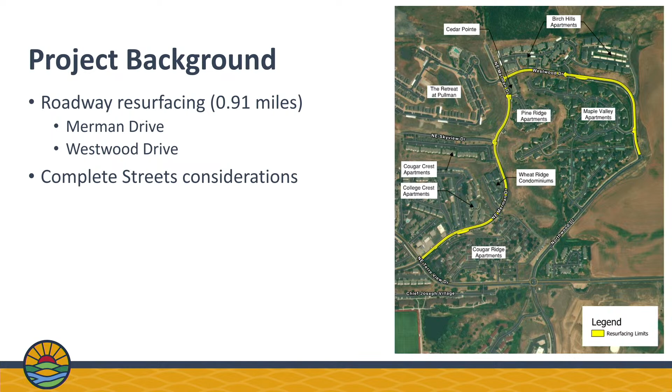In line with this policy, I will highlight several complete streets features that have been designed and incorporated into this project. The first focuses on pedestrian travel. The project will upgrade 7 existing curb ramps to be ADA compliant. In addition, 3 brand-new curb ramps will be constructed along the route. On the screen, there's a star roughly at those locations.

We also are able to install 2 new bus pullouts. This is a heavily used bus route. Actually, when you talk to transit, I think a bus comes through here once every 6 minutes. Most of the bus traffic tends to travel presently in the westbound direction around a loop, but there is a route, I believe, that also goes in the eastbound direction.

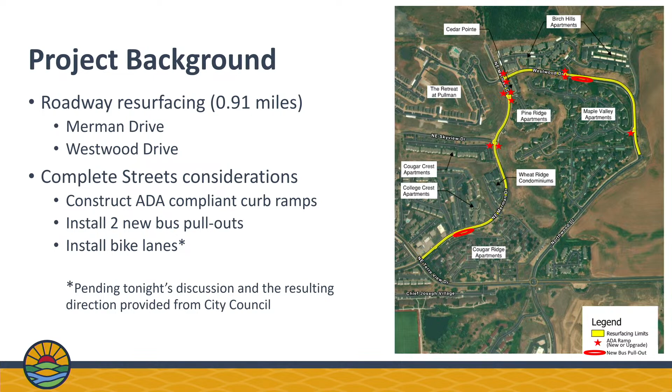Lastly, the project design considers bicyclists and proposes adding striped bike lanes to both sides of the streets to be resurfaced. Of course, this will require restricting parking on the streets. So it really depends on what you guys want to do and the direction that you want to go with tonight.

I want to provide a little bit of information about bicycle design. When it comes to designing bike facilities, it's really helpful to have an understanding of the types of bicyclists. Research shows that a large segment of the population, approximately 51%, would be willing to ride a bike if they felt safer and more comfortable doing this. This is essentially called your interested but concerned group.

How do I get this laser pointer to work? Maybe I have to... okay, there we go, I think I got it.

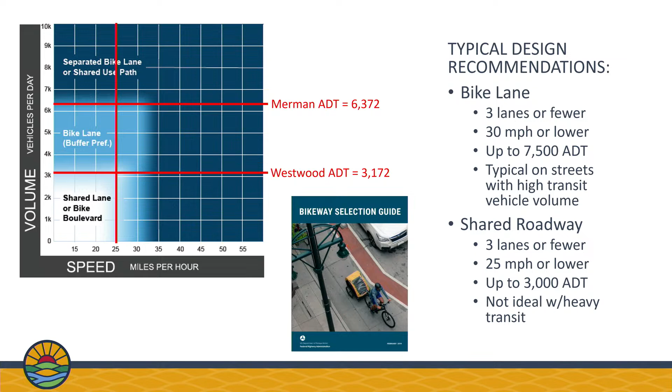Once the bikeway type was selected, design can focus on other site constraints. By far our biggest constraint here is the existing roadway width, which is 30 feet, for both Merman and Westwood. I gave you a picture of Westwood because the orientation looked good, and it also had a car parked on the street, so it's a good illustration.

The 30 feet is really the asphalt pavement width. There's a curb and gutter on both sides of the street. The typical gutter takes up 1.5 feet, which is the case here, so the 30 feet is really the asphalt width.

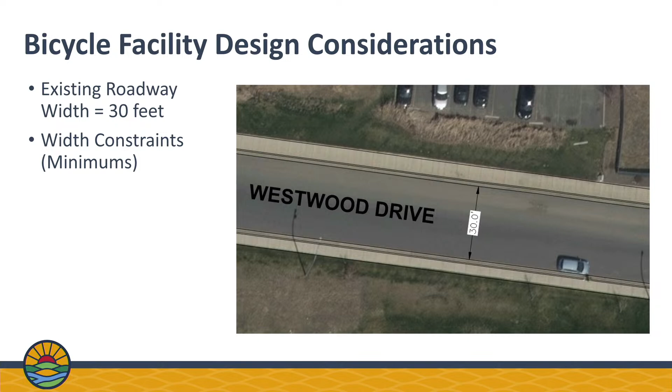We recognize that on-street parking is important, so we first analyzed whether we could put in bike lanes, or a bike lane, and still maintain that parking. We do have some width constraints, which I'll talk through, but let's look at the car that's parked up there.

Typical design for the width of a parking lane is 8 feet for a standard vehicle, which is what I'd recommend here. 7.5 feet wide is for compact spaces, so that's half a foot difference. I have 6.5 feet up there because you can actually use the 1.5 feet of gutter in that computation, so we have 6.5 feet that we need to reserve next to the gutter to accommodate parking.

When it comes to vehicle lanes, transit uses this route very heavily. We have some flexibility in lane widths on different routes, but transit is really our minimum constraint. We talked to transit and know our bus widths, and we know we can't go less than 11 feet for each vehicle lane, so that's 22 feet total. That leaves only about 1.5 feet of pavement, and you can't expect a bicyclist to ride in 1.5 feet.

All of the technical guidance typically says the minimum bike lane width would be 4 feet, so we're about 2.5 feet short, even if you swap parking on one side and whatnot.

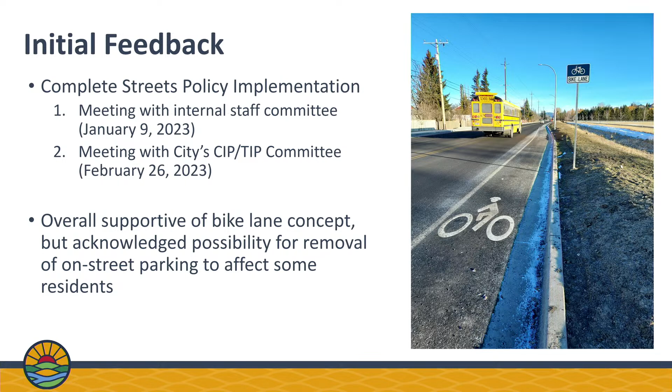The Complete Streets policy, as written, also requires seeking periodic input from the city CIP-TIP committee, the Capital Improvement Program Committee, and that was done on February 26, 2023. A link to that meeting agenda and all the information was provided in the council packet. Overall, both groups were supportive of the bike lane concept, but acknowledged the possibility that removal of on-street parking could affect some residents and potentially be controversial.

So, you thought you were going to have a short meeting, and you have to hear from me.

Let's talk about the parking now, because I want to focus on that. The existing condition is that parking is allowed on one side only. You could see from that first figure with the shadings that there's only enough room for one side to park safely.

The side on which parking takes place actually varies. It's a little hard to see on this screen, but I drew lines on the figure showing the side of the street where parking is allowed. I alternate the colors, and I'll get into that later, which goes along with the parking study and the different segments that were broken out. On Merman Drive, for the first portion traveling northward, you can park on the west side. Once you reach Skyview, it switches to the east side, and then you turn the corner to Westwood, where you're allowed to park only on the south side.

I mentioned a parking study. A memorandum was provided in your council packet. It had a lot of numbers, so I'll try and break it down a little bit. The parking study was completed in November and early December of last year by our interns. They went out to the site on 16 different occasions at varying times of day and different days of the week.

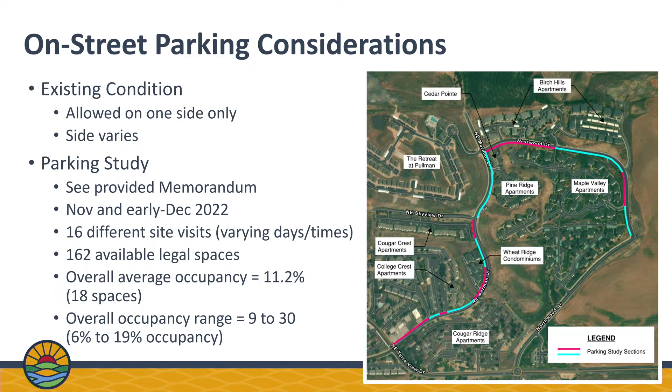I debated whether you wanted to see the specific data and numbers for this, and I went ahead and put it in. I think I can breeze through it pretty quickly, but it does help convey the parking situation along different segments. For segment 1, there are 6 available spaces, and the average occupancy was 5.2%, which is really less than one space. Parking was only observed there on 2 visits.

On those 2 visits, 1 visit there were 2 spaces occupied, and 1 there were 3. All the other visits, there were no cars.

Section 2, hopefully you can see up there, I tried to make it yellow so you can see where we're talking about, has 14 spaces, had a 13.8% average occupancy, which is approximately 2 spaces, and it had an occupancy range of 0 to 5. So it was unoccupied for 2 visits, and the other times it ranged between 0 and 5.

Section 3 is where you get up around the corner near Birch Hills. It has 28 spaces, 12.1% average occupancy, approximately 3 spaces, and the occupancy range was 2 to 6. So every time we went out there, there was at least 2 vehicles, and maximum there was 6.

Section 4, 37 spaces, 13.9% average occupancy, which is about 5 spaces. So we're seeing a little more numbers. Occupancy range was 2 to 8. So again, there were always at least 2 vehicles, and the maximum trip had 8.

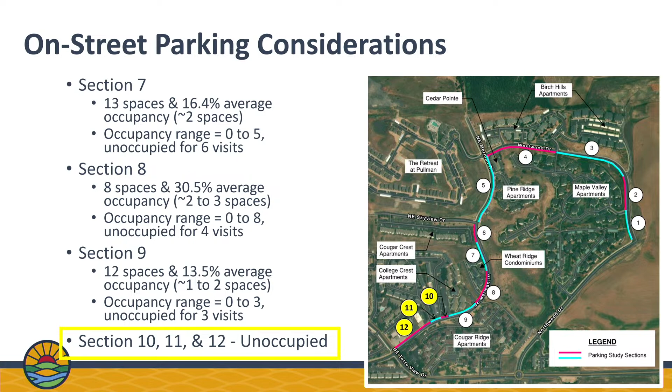We got our data. We're engineers. We like to crunch numbers.

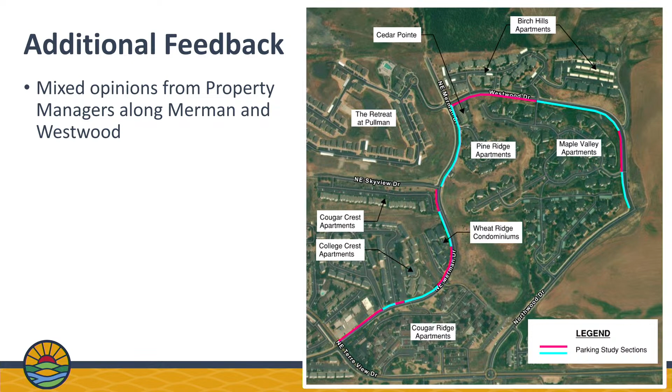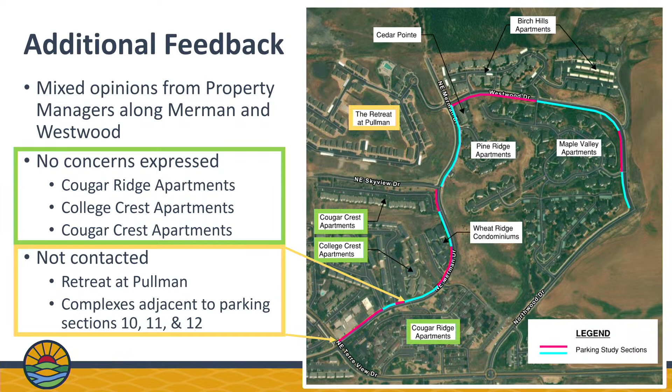But then we thought, let's do some outreach outside of the folks we'd already talked to, and reach out to some of the property managers along Merman and Westwood. So the Cougar Ridge Apartments, the College Crest Apartments, and the Cougar Crest Apartments, shown up there in green - I chatted with them, and they didn't express any concerns associated with removing on-street parking in favor of bike lanes. We did not contact Retreat at Pullman, and we did not contact any of the complexes adjacent to parking sections 10, 11, and 12, but we didn't feel that was very warranted based off the parking data we'd already collected.

But I feel like I'll throw that in there just so you're aware. I'm just going to go to my notes to make sure I don't miss anything. Got an extra one in here.

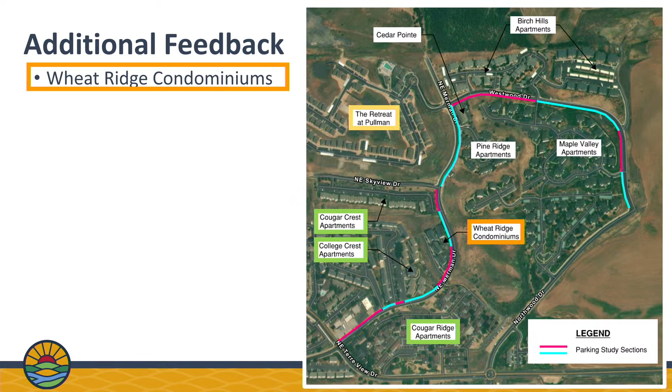Okay, so the Wheat Ridge condominiums shown in orange - on the previous slide I wanted you to see where that was at. That's kind of right on the bend. But if we zoom in to a closer view, you can see this complex is really 4 different buildings with 40 units total. There are 2 and 3 bedroom units, and 109 bedrooms total, based off the 1993 site plan that was approved for this complex, so unless they've remodeled or changed it, that's what I believe it should be.

Each unit is separately owned, which is a little different than some of these apartment complexes, so each unit is owned by somebody different.

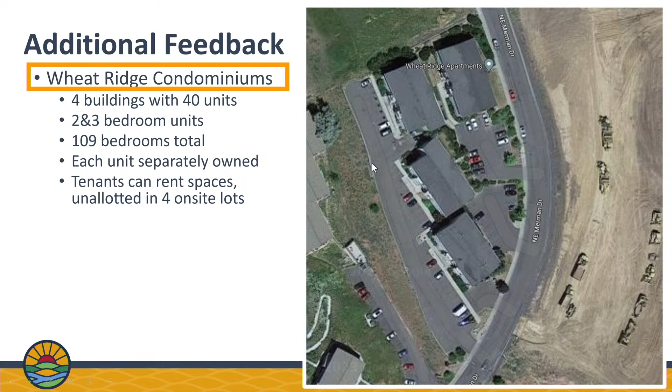The property manager was really helpful, and he explained that tenants can rent parking spaces if they own vehicles. They're not allotted a specific stall, but they can park in any of the 4 different lots on site. Doesn't quite look like there's 4, but I'll point them out if I can get my pointer working. There we go - there's a lot here, one here, a little tiny lot here, and then this long lot right here. It's really a first come, first served basis, from my understanding.

So we talked for a little bit, and the takeaway was that Building D would most likely be affected if you were to remove on-street parking. You can see it's removed from the really large parking lot and has a lot in front of it. In fact, even in this image, you can see quite a bit more cars in that lot than in the other lot.

So removing on-street parking here—you can see a few cars parked on street in front—even for cars that park in that closest lot, it's actually a shorter distance if you park on street to get to some of the front doors. So a lot of residents opt to park there presently. Removing on-street parking would require them, if that small lot is full, to park in one of the other lots and walk further. That would be the primary impact for this complex.

This one's a little different than some of our others. I mentioned the site plan was approved in 1993. This meets 1987 zoning code for parking in a multifamily residential complex. At that time, for this complex, which had 2 and 3 bedroom units, you had to construct 2 stalls per each 2 and 3 bedroom unit. So they provided 81.

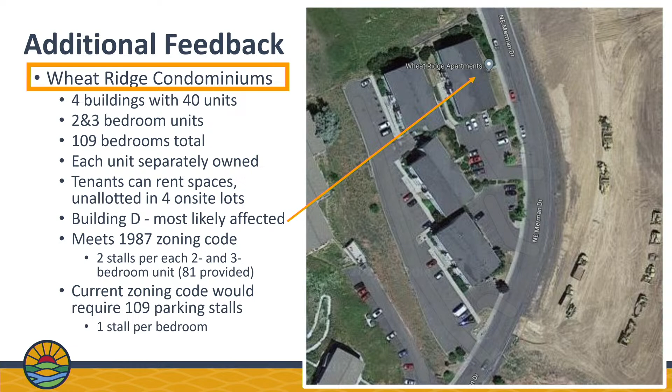So additional feedback—we did have a few complexes that are generally not in support of removing on-street parking. Those are shown in red: Pine Ridge Apartments, Maple Valley Apartments, Cedar Pointe, and Birch Hills Apartments.

Actually, let me go back. We really had one point of contact for these properties, Carrie Jo with Corporate Point Developers. She was really helpful and acted as our mediator, reaching out directly to the various property owners and reporting the findings back to us. Special thanks to her.

She was very helpful. Some of the concerns—the current parking policy for all 4 of these complexes shown in red is that on-site parking is reserved solely for tenants. So guests are directed to park on adjacent public streets: Westwood, Merman, and Northwood.

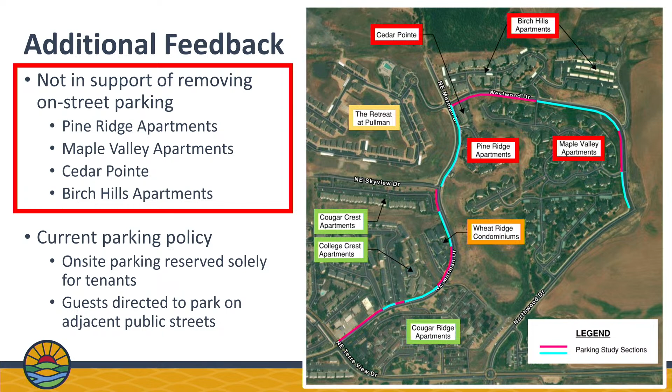Some other specific concerns they had—this makes sense and I believe this to be the case—there are some students who are likely not residents of the area, but they drive their vehicles and park on Westwood and Northwood, then take transit because it's a free parking space all day. There are lots of transit stops and buses come every 6 minutes, so it's very convenient. Some students have gotten very smart and do that.

One of the concerns Carrie Jo expressed was that if you remove on-street parking, some of those non-resident park-and-ride students may move into their complexes to park, making it harder for their residents. On top of that, they potentially have a burden to enforce on-site parking.

I will say—let's see—right up here there's this kind of dead-end segment of Merman presently, where parking's allowed on both sides of the street. We're not planning to remove that in any way. So that would remain a location where folks could park on street and still take the transit routes.

Northwood—we can talk about this later if there's time—is a little bit wider, and there's actually parking allowed on both sides of the street right here, right now as well. So that's another location where folks could go. There are actually 11 transit stops along this route. It would have been nice to show them up there for you, but...

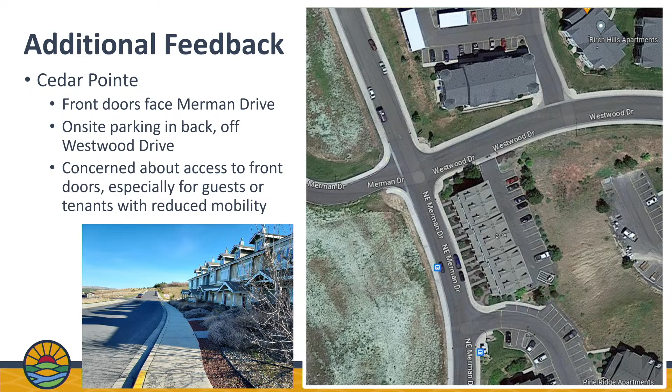Here's a street view of that back lot. You can see there are garages, so there's actually parking in the buildings as well for the tenants. This gives you a view of what I'm talking about if you had to park in that lot and walk up and around the corner.

So we are almost done. I want to give a little more context into the project and the timeline. This project is federally funded. The grant agreement covers 86.5% of project costs, up to a maximum of roughly $1.6 million, 1,650,000.

Because it's a federal project, there's a lot of reporting, documentation, and approvals that need to go into the process. This was in the staff report, but staff did elect to seek bids and obtain design approvals with inclusion of the bike lanes, because WashDOT does look at those and had comments. Adding them in later would potentially cause things to be much slower and require significantly more approvals later on.

The bid opening for this project was actually today. Spoiler alert: the results were pretty favorable, in line with the budget and the engineer's estimate. We've sent the different proposals off to WashDOT. We have to await their concurrence to award, but we're hopeful to request award of the contract at the May 9th council meeting, if we get that concurrence.

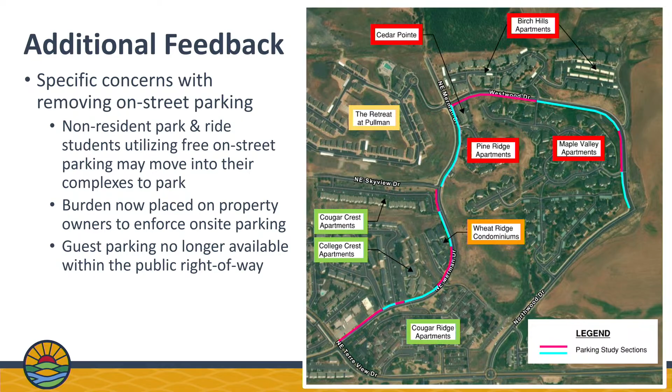Thank you, Mr. Mayor. Kara, thank you so much. I really appreciate the data, because for me that helps me quite a bit, I'm kind of a nerd that way. But I was actually really surprised, and I appreciate what Becky was saying, because I was kind of surprised at how little parking on street was actually going on for such a huge area.

I do agree with Becky that I would feel like, if it would be possible, to have one side, west side or whatever, have on-street parking, and then biking on the east side. I'm not sure if that's possible with the project, because even though I understand a lot of the younger generation - like when I was growing up, cars were the thing, you get your license, you're on the road, everybody has to have a car. Now that's not necessarily the case.

So I actually do feel like some of those interior spots - one of my buddies lived at Maple Valley, not all the spots were being used. And when I hiked around the exterior of the Magpie Forest up there, I could see that not all the spots were being used. But I do understand some of the other spots might be used. So anyways, long story short, I don't know if it's possible to put it on one side.

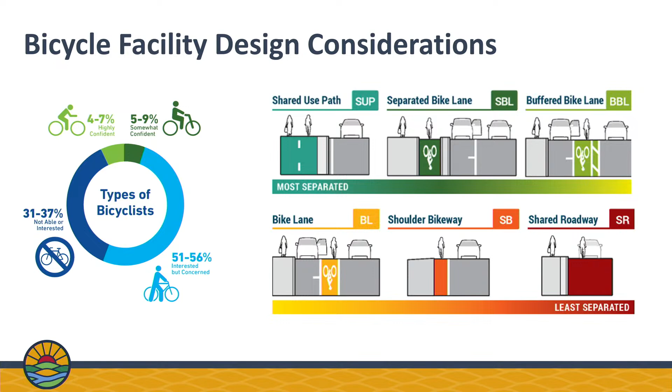If it's all right, I do have a little bit of information. So you mentioned you've been to places. Absolutely, if you have space, you're able to do it. A shared use path, totally removed, with as much separation as possible, is the best thing you could put in to encourage people to ride bikes, especially as volume goes up.

So when we look at this figure, I'm going to put Merman at the top. It's not completely out of it. But as you get into those higher ranges, 7,000, 8,000, 9,000, a separated shared use path is absolutely the preferred approach when you get higher into those volumes.

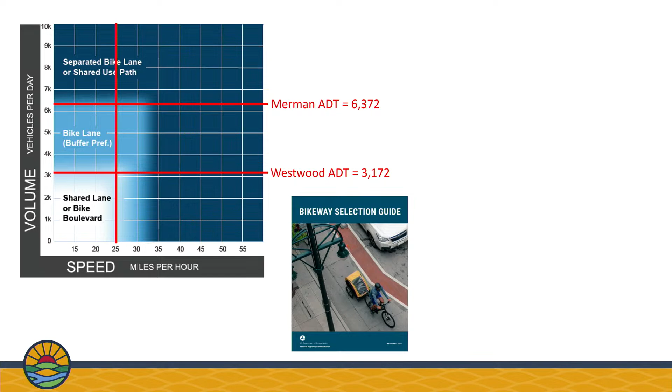I did run a couple of numbers because I thought it would be interesting. You asked, okay, we're constrained because this is an existing road, it's got existing curb and gutter, but let's say, in a perfect world, we're 3.5 feet short of being able to get the 4-foot bike lane on one side and keep the parking.

So I crunched a couple of numbers. Let's just assume that you can widen one side of the street, not jump around or do 1.75 on one side and 1.75 on the other. Let's just assume that we revamp one side and pull it out, since we probably do have the right of way.

We'd be looking at really 0.9 miles of new curb and gutter, $313,000, 0.9 miles of new 6-foot wide sidewalk, $335,000. You also have additional asphalt to put back down, not as much, about $35,000. Once you're doing all that work, it adds up.

So that's $684,000 to think about. And it'd probably be a similar option if you did a shared use path and kept the curb and gutter and widened the road. You'd be redoing all of that.

The other thing that's really cursory, because even as I look up here, there's stormwater ponds, there's hills. You look at pushing it back, you've got grading, landscape restoration, utility adjustments. You also have to account for mobilization. I think you'd be in the $800,000 range, which is 10 times the cost of what we're talking about to still see a nice improvement in terms of bicycle facilities.

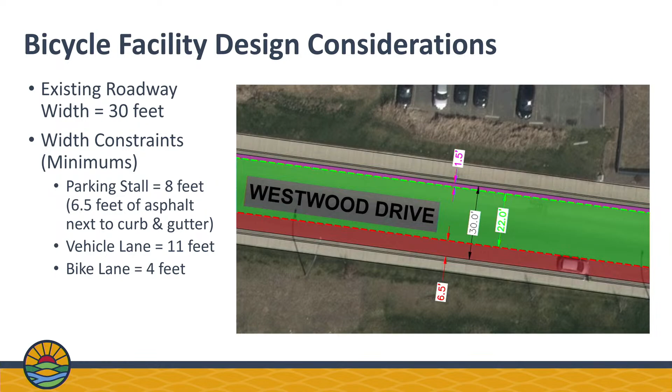So I had that. You had a comment. I thought I wrote it down. The different types of vehicles, I think that's probably something council would have to look at, like you suggested, as those types of features get used even more.

And then your second one, I'm now spacing on what your second question was, so I guess I'm not going to be able—can you remember what that one was? The one side, as Becky kind of mentioned, one side having parking and then one side on the bike, for instance, having west side parking all around. Yes, I instead think of your—the other one was actually Northwood, and I will comment on that.

Oh yeah, if I can find the right slide. That's the one problem about all these animations, they get a little painful.

So you are absolutely right. We just put in a new roundabout at Fairway and Terre View, with little on and off bicycle ramps associated with that. University Crossing to the south, the big development there, they're putting in a path along the east side of Fairway, so that's going to connect up to campus really nice. As you continue on Fairway, there's quite a few bike lanes on campus, so that's a direct link.

Next year, with our Complete Streets funding, for our past project, we are looking at putting a shared use path on the south side of Terre View from the roundabout all the way over to Merman. So another direct link. Plus, as you continue down Terre View, on one of our sidewalk projects a few years ago, it's not a shared use path, but we widened the sidewalk along a good section of Terre View on the south side. With that past project, we're talking about a rectangular rapid flashing beacon a little further down near the storage units, to cross over from that widened sidewalk to where there's a path along Terre View as you go past SEL. So there's a lot of direct links here, plus you have a path that goes all the way out Terre View to Airport Road, connecting all the way up with the highway.

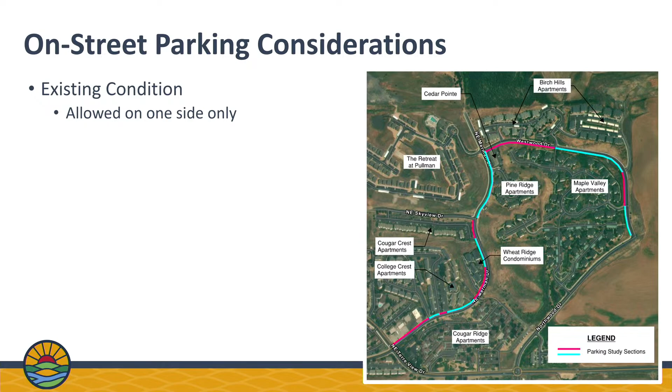I just want to say my option three is that we wait, wait to see how development goes, wait to see what parking does. And I just want to make the comment, if someone told you that guests coming to your house could park 4 blocks away and take a bus to your front door, that should work - I don't think you'd be particularly happy about that. And the 6 minutes, I'm sure, is in the morning, not in the evening.

Yeah, correct, I think it does slow down in the evening. The parties are in the evening generally. The guests - we probably don't want them driving anyways, right? Yeah, it's a hard one.

Okay, so you've heard option three is pave, hold off on the bike lanes, allow parking, and then we can mark something up later. If we go with option three...

We'd still qualify for the federal grant even though there's no bike lane decision made. For the federal grant, we need to proceed with selecting whether that grant's going to pay for the bike lanes or not. If we go with it now, it will cover it. If we don't, we probably won't have an opportunity to add those back in. But we could use our own funds or some other funds to come back and stripe it at a later date. I know WashDOT has an active transportation fund that they've got a considerable amount of money for bike lanes - it's called the active transportation fund. I know they have that because I've seen it come up in our TIB meetings.

So where is the council on this? I worry with option three we won't come back to it. Yeah, that's my only worry with option three too. That's generally what happens, sometimes that's sad but true. We do that, I feel, too often.